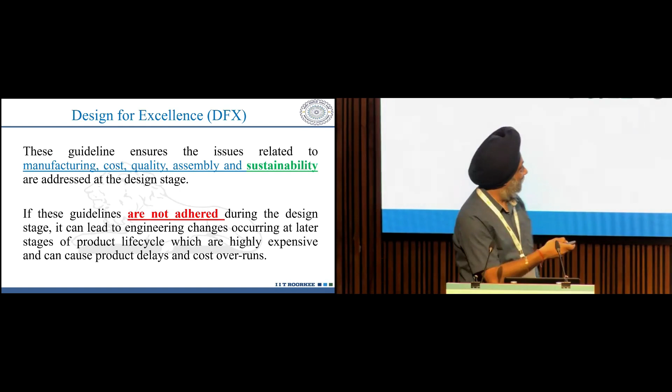Not changing. Now it is. It will take some time.

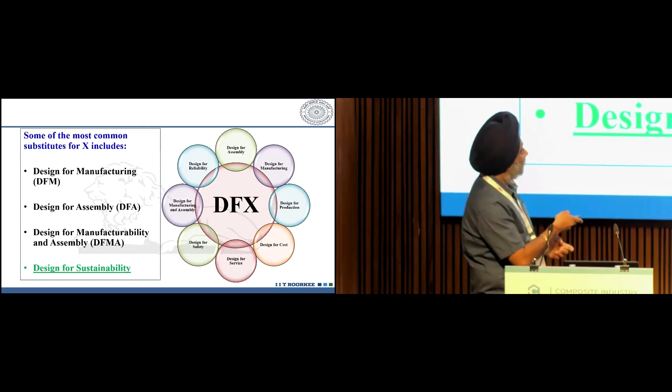Pointer, I think, is not working. Okay, now it is working. Okay, so I was here, so I think I had to point it this way. So this is the context in which I am going to speak.

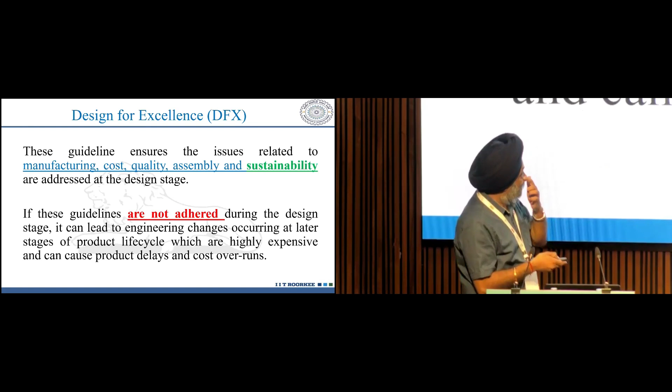Now we have a concept of design for excellence, because when we talk of a product, we talk about manufacturing, design of the product, then manufacturing, and then using the product. So the first thing in a product development cycle is design. This design for excellence is a well-known concept. What excellence means, X can be a variable. X can have different aspects as mentioned there.

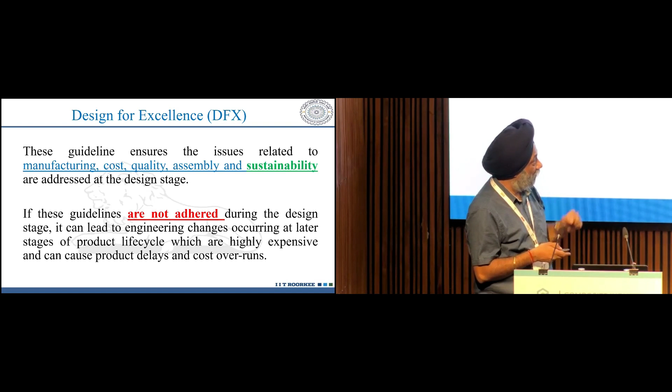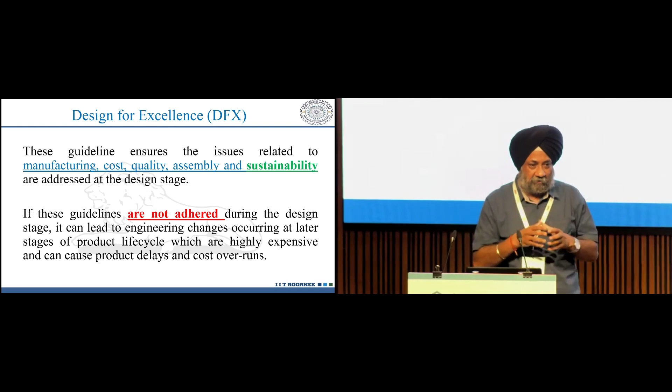It can be manufacturing, cost, quality, assembly, sustainability. Sustainability I have definitely put in green because that is the title of the talk today. And if these guidelines we are not focusing - now in design for excellence, the basic concept is that when we are selecting or making a product, we have to focus on all these aspects: cost, quality, manufacturing, assembly, sustainability, and come up with a solution that makes a trade-off among all these different aspects.

For example, for the aerospace industry, one of the important aspects can be weight. Since morning all speakers have focused on weight, so weight can be one of the parameters for a product used in the aircraft industry. In one of the books it is written that if you are able to save 1 kg weight of an aircraft, you can save 6 gallons of fuel. That is the kind of indirect advantage you gain by reducing the weight of an aircraft. So what I am trying to emphasize is focusing on what the product is going to do.

For example, if you want to make a toothbrush handle, weight may not be a very important criteria there, because already it is lightweight plastic. Then you are making a composite - target can be sustainability. There is even a design in which a toothbrush handle can be used multiple times, only the part with the bristles will change. It can be screwed or joined using any type of arrangement with the handle. So you can reuse the handle multiple times, only changing the bristles part as per the doctor's advice, maybe after every 3 months.

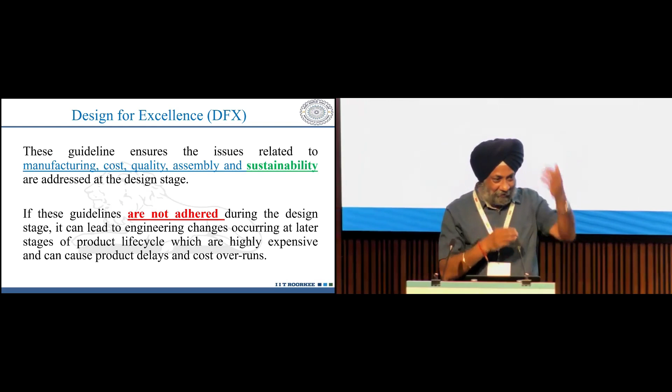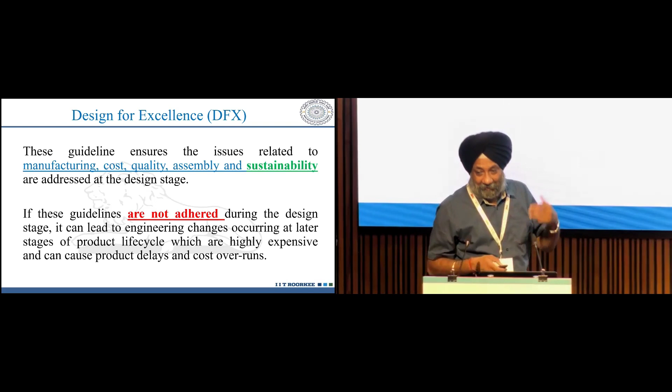So when you are designing a product, you have to see what the focus areas are for that product - it can be cost, reliability, quality, assembly, manufacturing, sustainability, environment. We have to keep that in mind. And if we don't follow these guidelines, what can happen? Many products - if you Google or go to YouTube and search for failed products, you will get a long list of videos highlighting failed products and why they failed. So if the guidelines are not followed at the design stage, the product can fail.

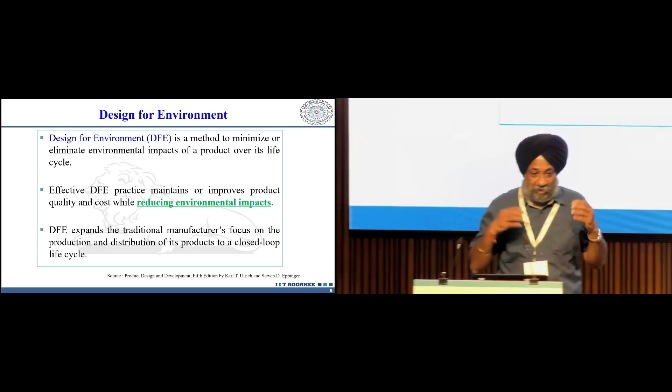Now DFX has got different dimensions, as I have already highlighted: assembly, manufacturing, cost, service, safety, reliability. Now our focus today is design for environment. So sustainable composite materials means materials which are good for the environment. How can we follow these guidelines? What is our model today? I think those from industry will definitely echo the same sentiments that I have.

What is our model? Our model is take, make and waste. So we take some material - first we identify who the raw material suppliers are going to be. In the morning, I think everyone has said there is a challenge to get raw materials. So we take the raw materials, we make a product, we sell it in the market, and then our job is over. Normally we don't think about what will happen to the product at the end of its life. But that is not going to be the case in the next 10 to 15 years. We will have to take responsibility for our product right from the launch in the market to what happens to it at the end of life.

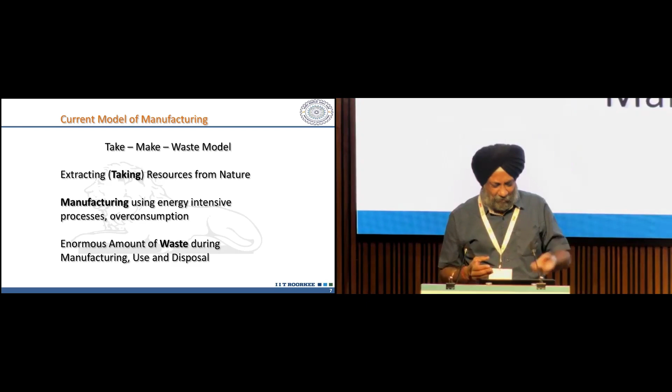I have just two sentences to say. One of our professors went to Japan and bought a second-hand car. When he was coming back, he was not able to sell it again. He had to pay more money for disposing it off than the money he spent buying the car. So what I am trying to emphasize is, you as a user have to take the onus of the product, or as a manufacturer first you have to take responsibility, then as a user, for what happens to my product at the end of life.

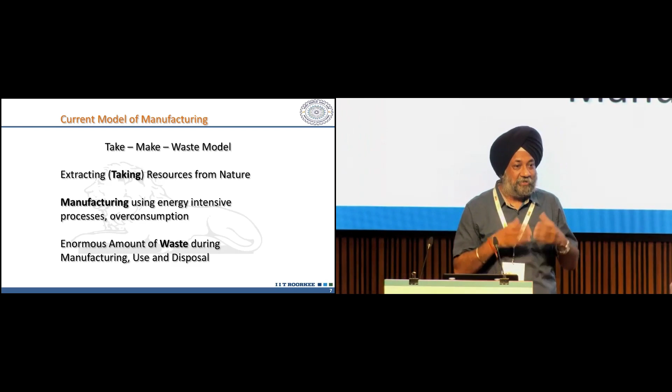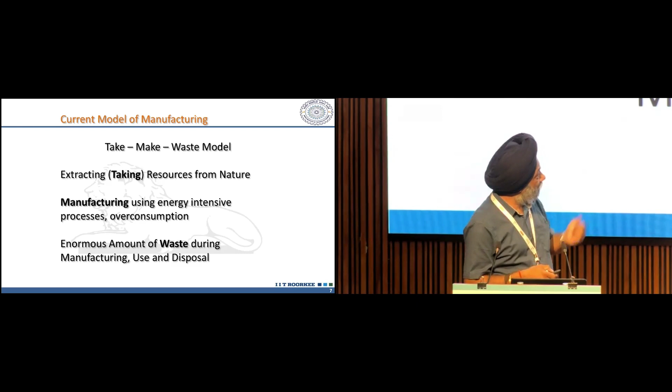So therefore these concepts become much more relevant, that we design a product in a way that it is reusable, it is recyclable, or you can remanufacture it. So therefore this concept of design for environment has come into being. Enormous amounts of waste are created, and we have to see how we can eliminate this waste. This is the overall product life cycle.

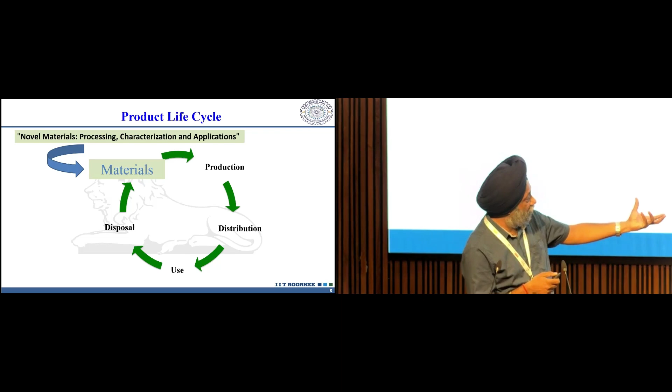And finally, at the end of life, what can be done? We can try to decompose them, and they get converted again into the natural ingredients. So this is a cycle which we try to analyze in our studies.

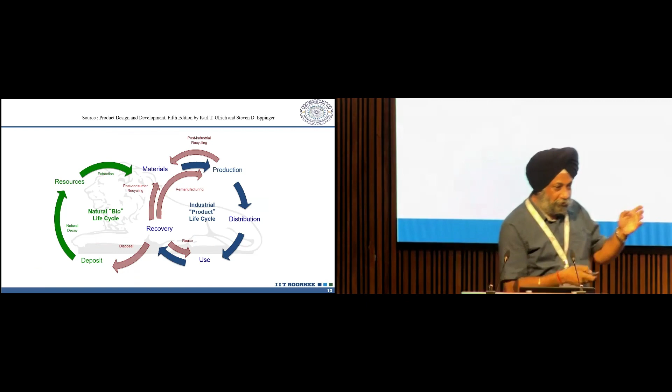So this is a very, very important diagram, and this chapter has been introduced in this book by Steven Eppinger just maybe 10 years back. Earlier, this was a book, a very famous book, Product Design and Development, but now this chapter on design for environment has been added.

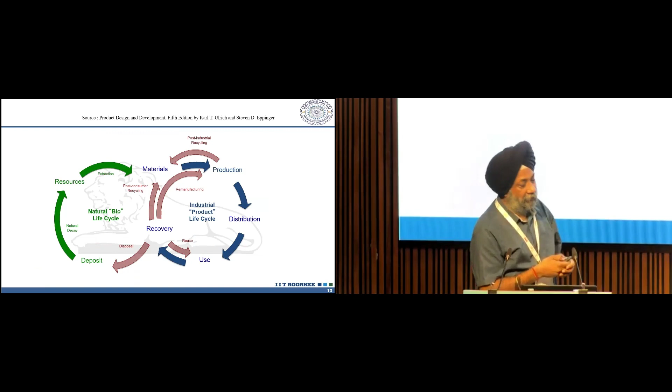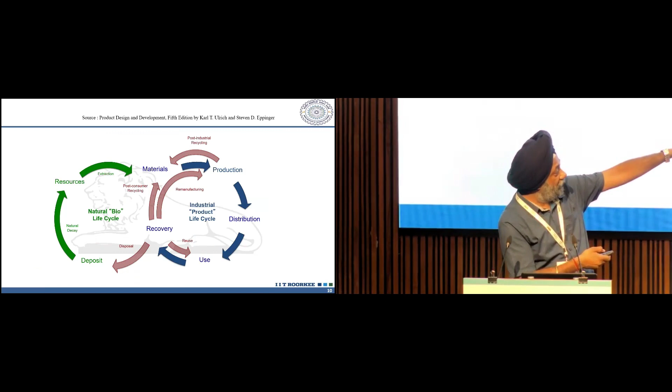And if you see, this is a natural cycle on the left-hand side. From nature, we are taking the materials, we produce a product, distribute it, use it, and then at recovery we have to see what can be done with these materials. So this is, I think, a challenge.

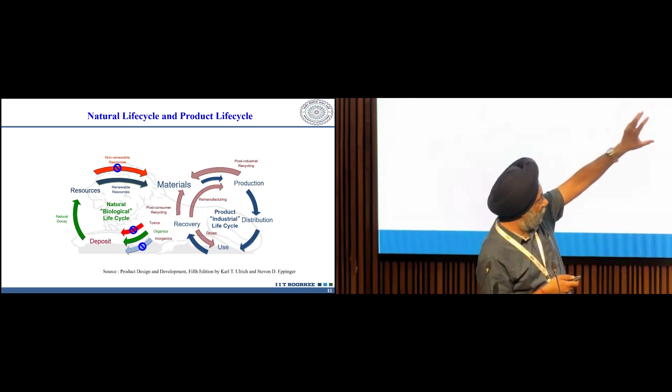So our first decision to choose a material for our product is very, very important, because if we choose a very environment-friendly material for our product, then automatically at the end of life we will have less challenge to dispose it off into the environment. So the first decision regarding the materials, if we can get that right, it will make our life easy. This is a summary of this.

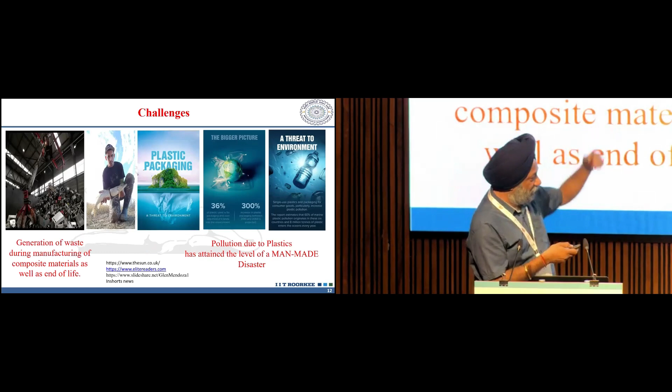These are the challenges for plastics all over the world. Every year we celebrate... these are some of the case studies about plastics. These are the single-use plastics. I will skip this, I think everyone is aware. So on World Environment Day, every year we try to focus on the environment.

So what the composite industries can take from that is, we have to reduce the use of polymers and try to emphasize reuse. Now reuse is only possible if your raw material is recyclable. If you talk about thermosets, they are difficult to recycle, but for thermosets also now there are a lot of strategies - you can pulverize it, grind it, and then mix it with some other form of material, use it as a filler. So you can have different strategies for recycling thermosets also, but thermoplastics are easily recyclable. We have done a lot of work in recycling of thermoplastics also, and published it. So if someone is interested, you can write to me, we can discuss it further.

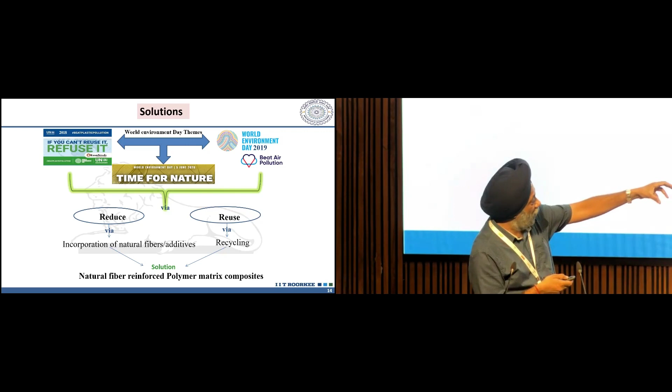So what we are trying to do now is, with this reduce, reuse approach, we are trying to integrate natural fibers with thermoplastic polymers and trying to make composite materials which are natural fiber - natural fiber reinforced polymer composites.

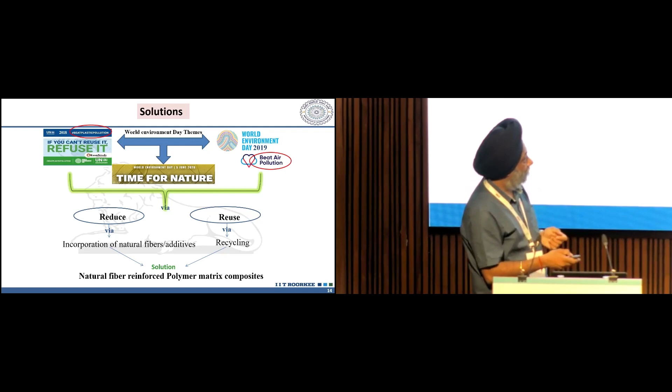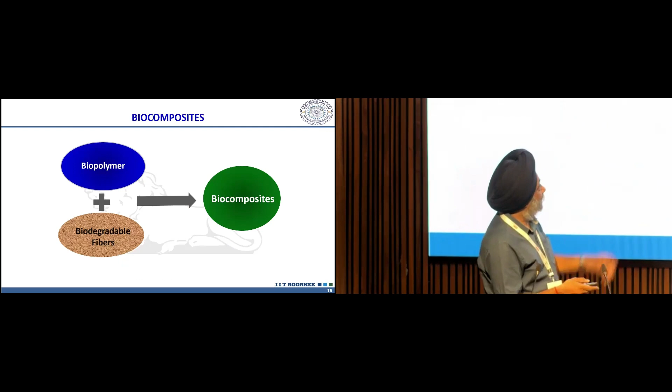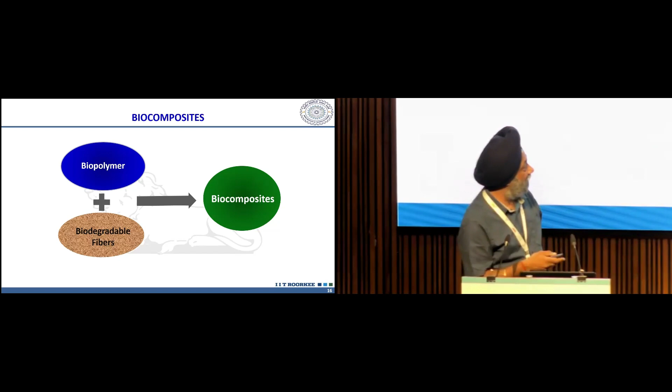So this is our concept now. We take a polymer, which is our matrix, which is biopolymer, and biodegradable fibers, and combine them together. How we combine them, I will show in the next slide, and then we try to make biocomposites which are green in nature. So sustainable composite materials we are trying to emphasize, which are renewable, recyclable and biodegradable.

Now many times these materials are difficult to degrade, and biodegradable means you degrade them under a specific environment, maybe a composting environment. You have to create a pit, put the samples there, and then investigate how this material will degrade. So all those aspects we are trying to analyze.

One of the students has already completed a PhD on understanding how these composite materials degrade over a period of time - maybe 6 months, 1 year, 1.5 years, 2 years - what happens to the materials. So that kind of studies we have already done.

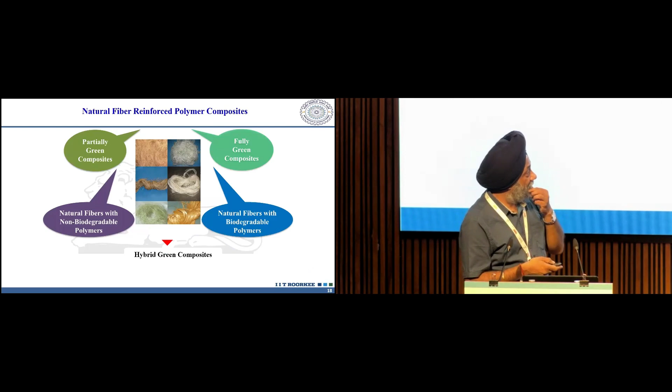This is a concept of natural fiber based composites. You can make partially green composites or fully green composites. Fibers are derived from nature - they are natural fibers. And we can even have hybrid, where many times we talk about the strength.

I know this question will come to many delegates' minds: the strength of carbon fiber is very high, glass fiber is very high. How will these natural fibers attain that kind of strength? So therefore, I told initially that these materials right now are being proposed for non-structural applications, high volume.

On a table you have a stand which is made up of plastic. Now you can replace that using a thermoplastic with 30-40% of fibers. The fibers are also coming from maybe sugarcane waste fiber, or rice husk, wheat husk, or even in Uttarakhand and Himachal these days.

Maybe in the month of April, May and June, there are a lot of forest fires - all of you may have read in the news or seen on television. Now these fires are caused because of the pine needles of the pine trees. The government is saying they are ready to give them free of cost, even ready to collect and supply wherever you want, because this is a menace that leads to forest fires, with lots of our jungles subjected to fire.

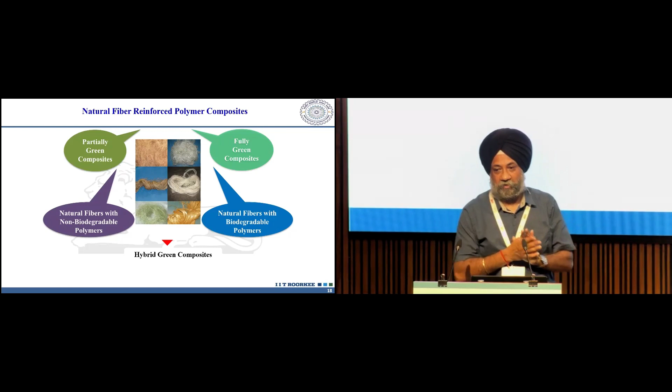Even the Forest Research Institute is doing a lot of research on how to avoid this problem. We are also collaborating with Forest Research Institute in Dehradun, trying to develop fire dousing tools. This year only, 5 people lost their lives during jungle fires in the state of Uttarakhand. So this is a natural resource which is freely available.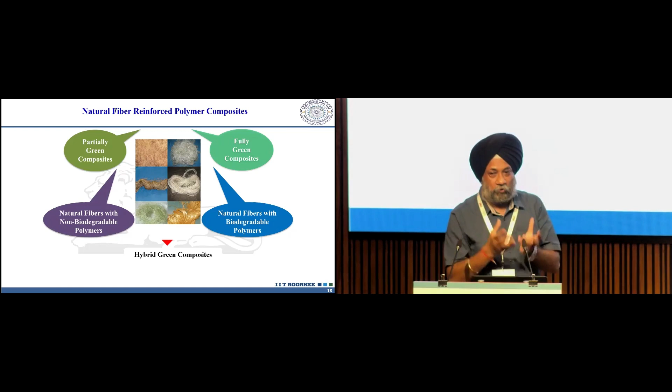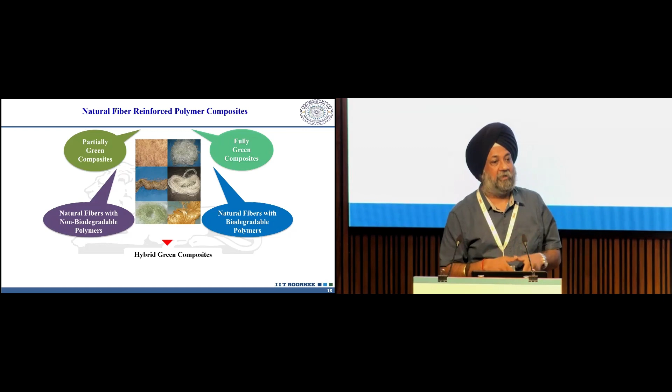Now if we can put 30% of this into making tables with biopolymer, this can be a good product that can be used by all of us, which will be environment friendly, or we can say a biodegradable product. So this is the concept through which we can achieve this. The next slide will make it more clear.

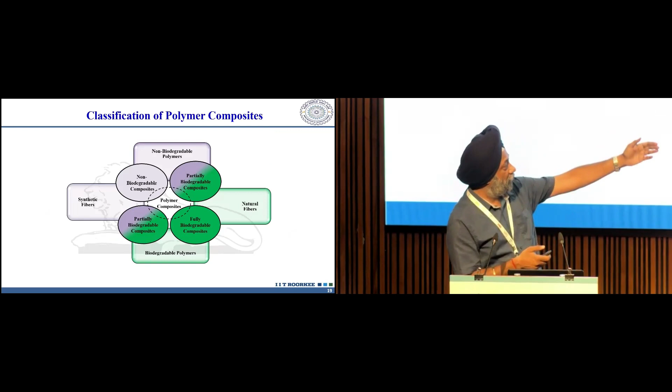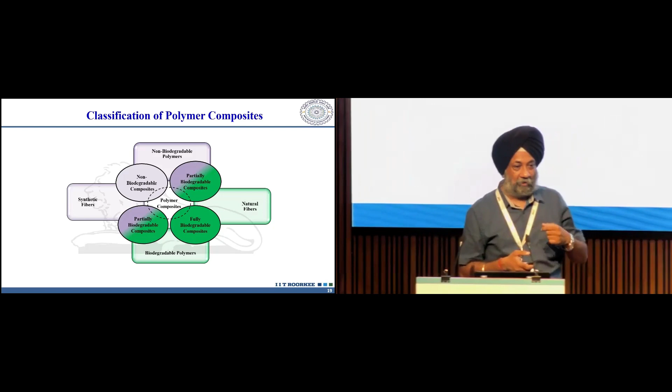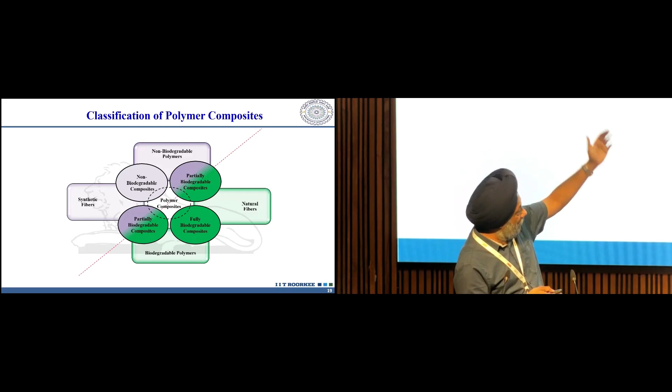So if we have natural fibers and biopolymers, we can make fully biodegradable composite materials. But at the same time, there are non-biodegradable polymers like the ones we use today - epoxy, polyester. So if we have different types of non-biodegradable polymer, combined with glass fiber or carbon fiber, we make non-biodegradable composite. In future, maybe we will see a transition from non-biodegradable to fully biodegradable composites without compromising strength and other requirements.

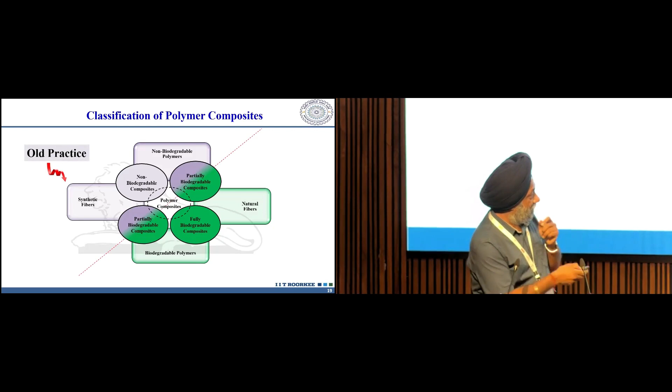And this was the old practice, and this is the research trend now.

Today also, this morning I was checking my email, 2-3 research articles have come, not only from India but from the globe, where people are focusing now on natural fibers all over the world. It's not only that, but India has very large flora and fauna, the kind of fibers - we are the biggest producer of many natural fibers as a country. So we can always leverage the potential that nature has already given us.

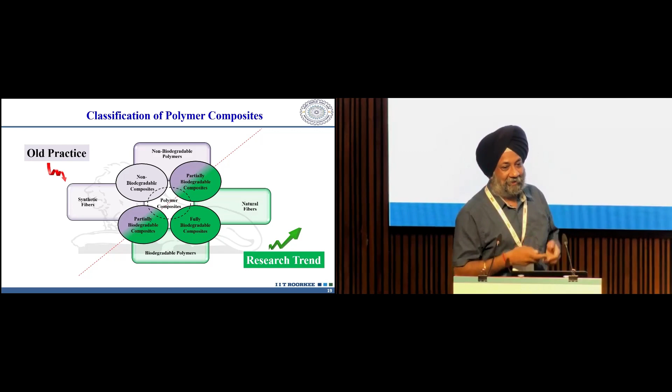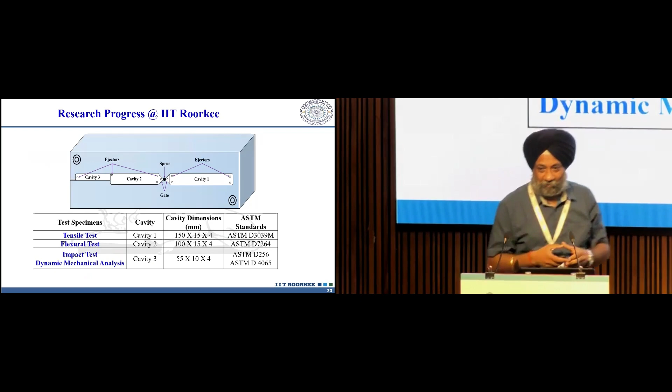Now we only have to think how we can make entrepreneurs out of it and how we can make products out of it. So what we have done now - maybe another 10 minutes - because we are an academic institute, our outcome is measured in terms of publication and technology transfer. So we do research in this area.

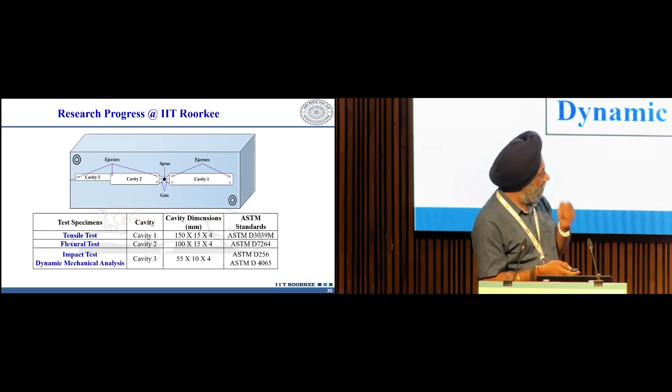These are the samples that we make, which are as per the ASTM standards. Different tensile, flexural, impact testing samples we make.

This is the setup that we use. This is a direct injection molding setup, where you have a fiber and a polymer. Fiber is in short form, so these cannot be used for very high strength applications. Where you need very high strength, you have to go for woven fiber as a reinforcement.

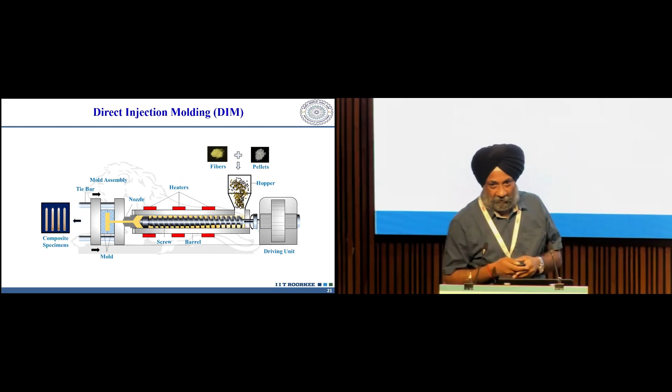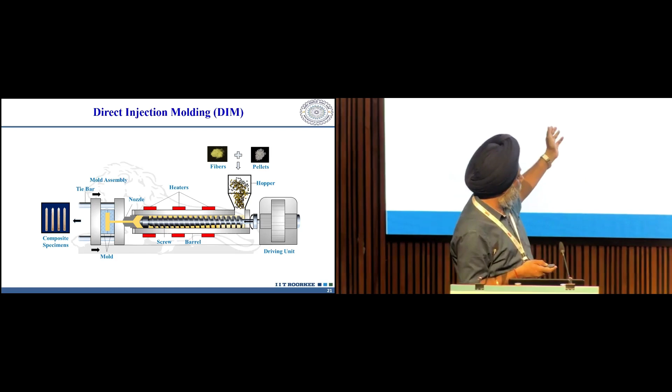But here we use short fibers. Natural fibers are available easily in this form. We mix the polymer pellets and the fibers, and then mold them into the samples.

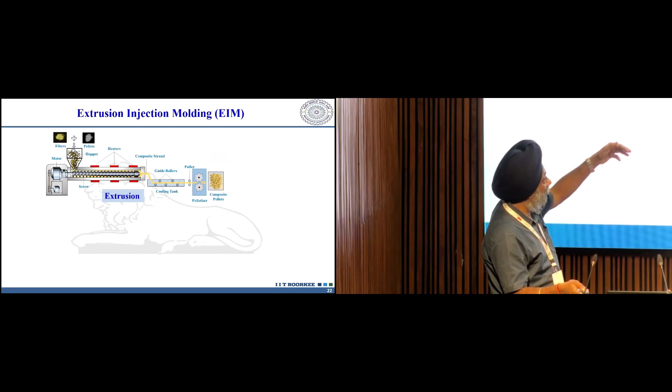These are the samples. Then we use the extrusion injection molding process also, where we extrude initially the fibers and polymer pellets into composite pellets, and then these composite pellets we use as raw material for injection molding and make the samples.

This is an extrusion cum injection molding process. Same samples we have made here also.

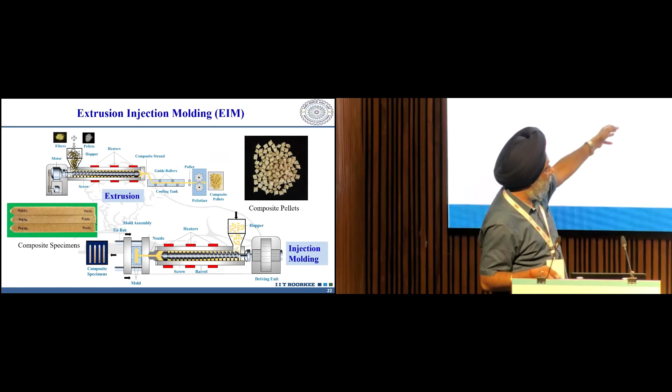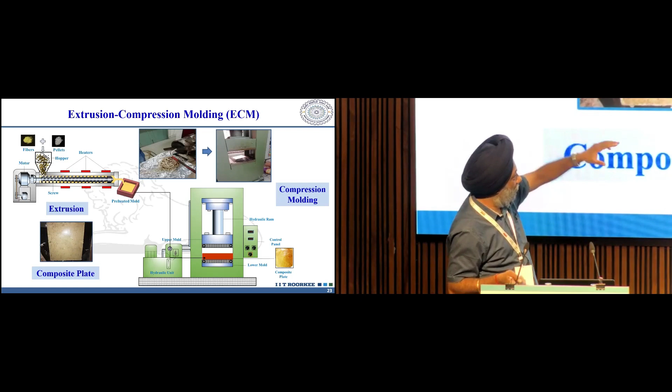Then we can even use extrusion compression molding, where we extrude first a wire, then take it to compression molding and compress it into the form of a plate, where we get composites in the form of tiles. I'm not showing the mechanical characterization, but these are all samples made by different processes: direct injection molding, extrusion injection molding, and extrusion compression molding.

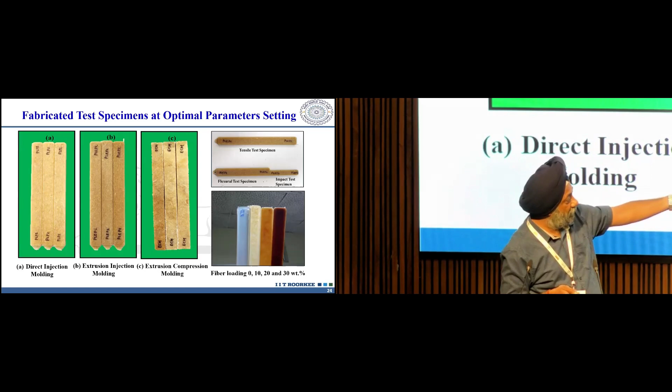If you see the effect of fiber loading on the right hand side, we can see a pure thermoplastic sample versus composite thermoplastic samples with 0 percent fiber, then 10 percent, 20 percent, 30 percent. So the color is also changing by addition of the natural fibers.

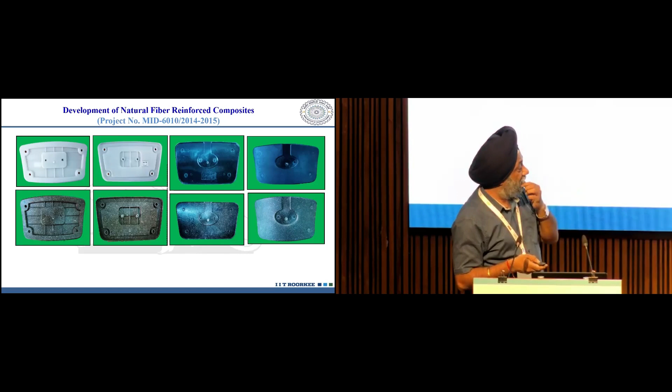These are some of the samples. We got a project from the top furniture manufacturing company in the country, and these were the products we changed for them. The top one is the first product that they were making, a pure polymer product. Then we put 30% sugarcane fiber into it, and this is the product that came out.

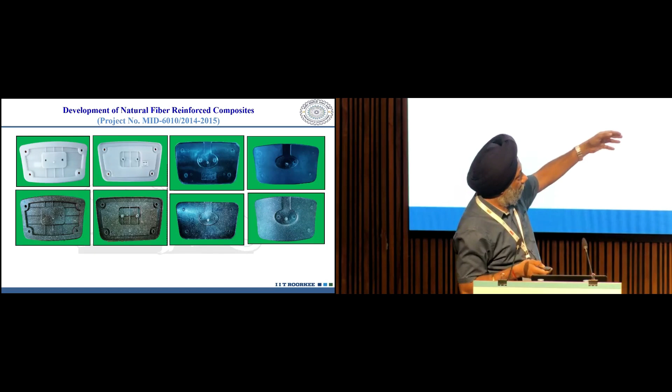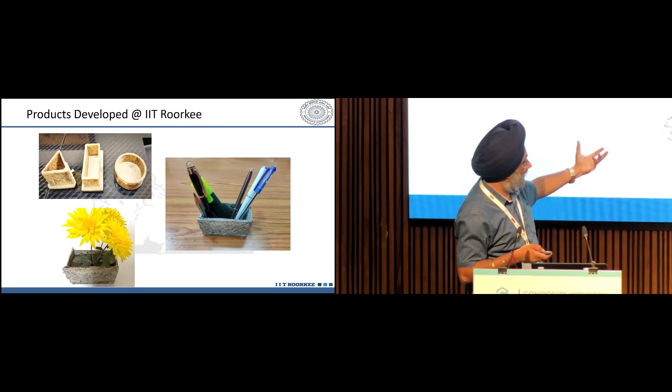These are some of the products we have developed. These are all child parts in a chair, different types of child parts that are used there. Then this is a flower pot which can be made, and this is a pen stand which can be made with a natural fiber based compound. You can even give different shapes depending upon the mold that you use.

Then this ward separator, during COVID we have developed this. This is not our image, but we have also developed a similar ward separator in which we recycled the coats that were used for the patients. Those were recycled and then used with jute fiber to make the composite.

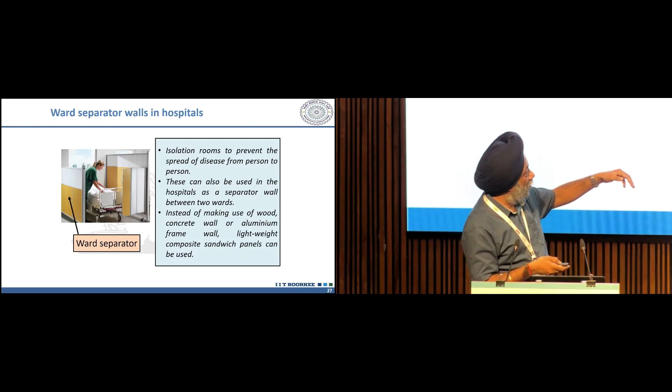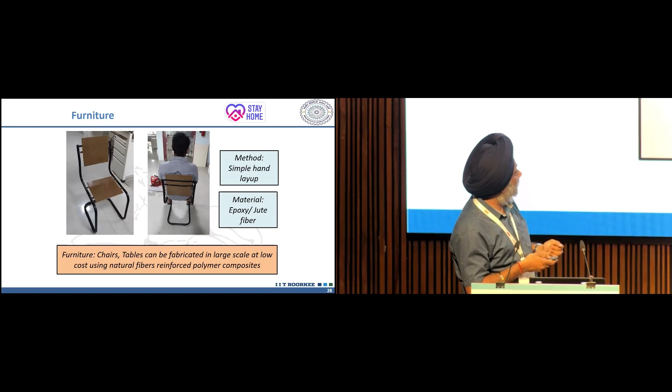This is one chair with jute fiber and epoxy, made just as a demonstration of application of composite. This can undergo a lot of iterations; it can be further improved.

I have already got a message about the time, so I'm just skipping some of this.

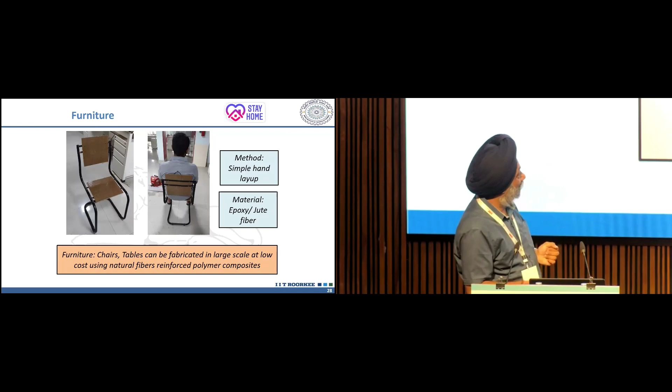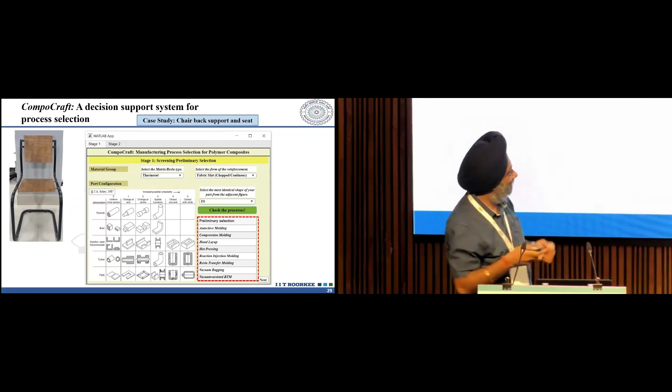So now, since many of you are from industry, sometimes we feel that X is an expert or Y is an expert in this field. Now, how to get in touch with that? And many times for academia, you feel that IIT or other institutes charge a lot of money to provide the expertise.

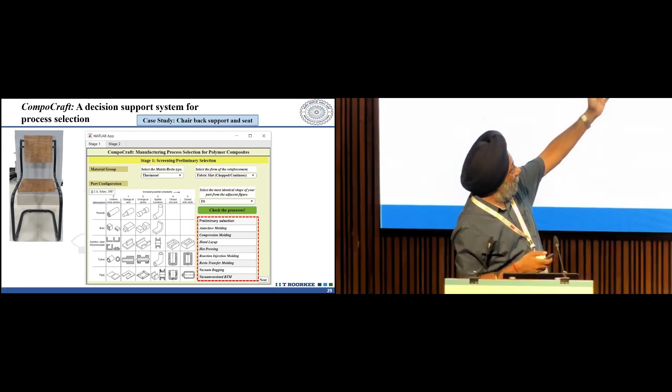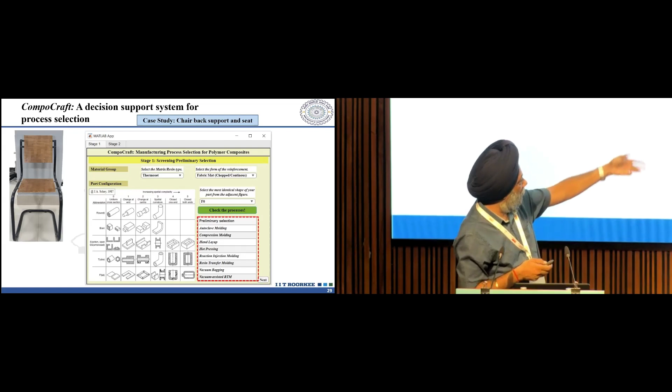So one of my students has developed this software, which is a process selection software where a user can give input. As you see at the top, thermoset or thermoplastic, which material you want to choose, there is a drop down menu. Then the shape complexity or the process also, check the processes available from this table. You can see which shape closely relates to the product you want to make.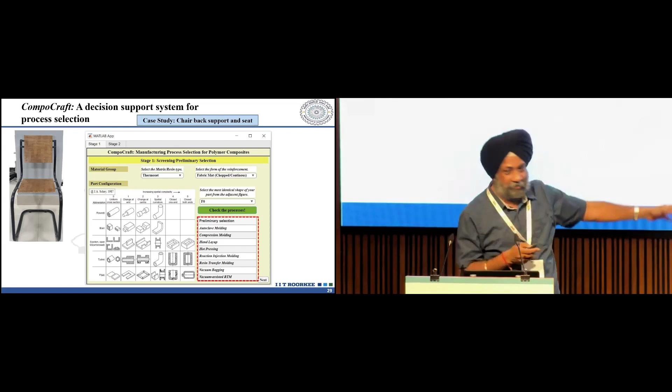So based on all this information the user provides, he may not be having any technical knowledge. He may not even have heard of all these processes listed there. He may just be an entrepreneur who wants to start a business in the field of composite materials. So they can use this platform for selecting the right process for the composite material.

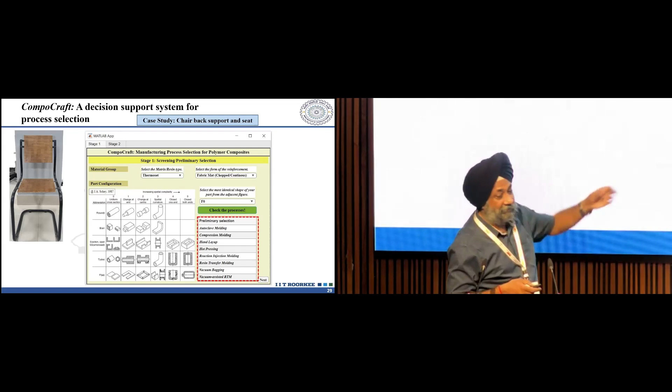So we have done a case study on this chair only. Now this calculates based on the input. It calculates PCS, which is a process compatibility score for all the processes.

All these processes that you see there - compression molding, hot pressing, reaction injection molding - there is a long list of processes. It calculates a PCS score and a cost rating.

Now many of you may be wondering how this software will work. This PhD student, a girl, has already completed it. In composites there is a lot of experimental work - you have to go to the lab every day, spoil your hands working with machines. Being a girl, although girls do better job than many of us when sincerity is concerned, she said, sir, I am from industrial engineering, I want to do something related to software. So I said, okay, you do this job.

And she has done a wonderful work in this. 2.5 to 3 years was spent only on collecting all the data available in the world in the field of composite materials, manufacturing of composite materials, and processes related to composites. A huge database was created, and based on that, she used artificial intelligence and machine learning algorithms to code this whole program.

This is a graphic user interface created for the composite industry, where the user may not be an expert. He would not like to spend 3 years to collect this data. He or she can just put the input that I want to make this product.

It resembles closely to this product, because if it is directly the same product, it will even give a better result. So you choose the shape, you choose the volume, how many you want to make, you choose the material - thermoplastic or thermoset. The software will calculate these two scores, the cost ranking and the process compatibility score.

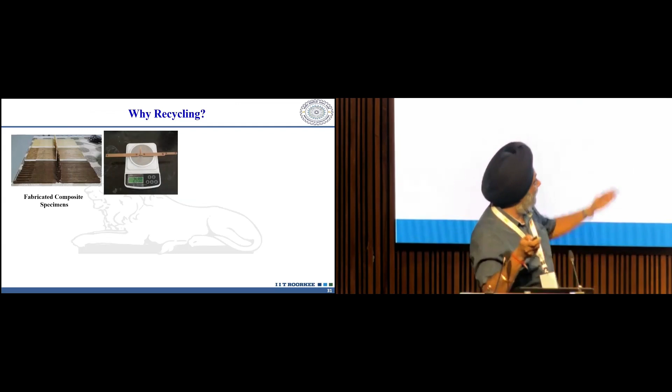Now the last part, the future, where it can lead us. These are all the samples that have been made, and you can see it showing as 25.98 grams, and if you cut that sprue part, it is 2.46.

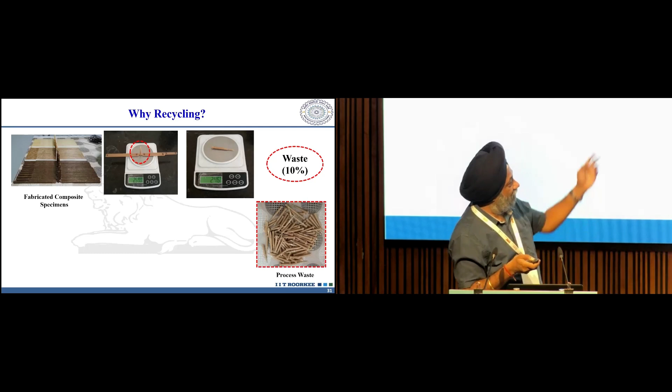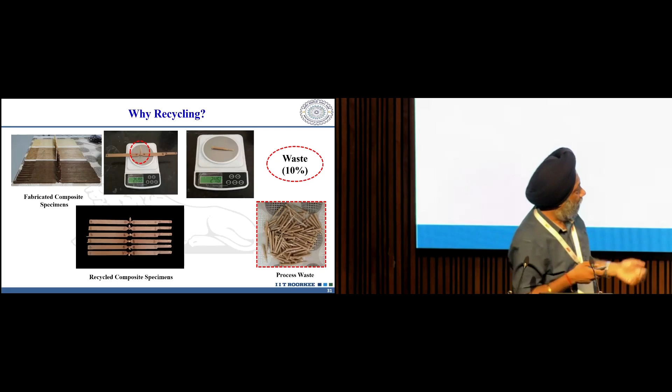So almost 10% of the material is going as waste. This 10% we have collected, we have not disposed it off. For different samples that were fabricated, with this process waste only, we have recycled them into samples and tested again. Multiple time recycling was done. I am not showing the results here, but we have found that 3 to 4 times, even 5 times, if you recycle, the properties of the resultant composite are better than the pure polymer.

This is a thermoplastic polymer. So if you use a polymer, you get property X. If you add fibers into it, X plus delta X. But when you recycle it multiple times, still the property that you get is more than X. So it means it is recyclable 3, 4, 5 times, and still you get properties better than the pure polymer product.

This has also been published in an article. If someone is interested, write an email to me, I will share it. Read the article to see how it was done and what results were achieved.

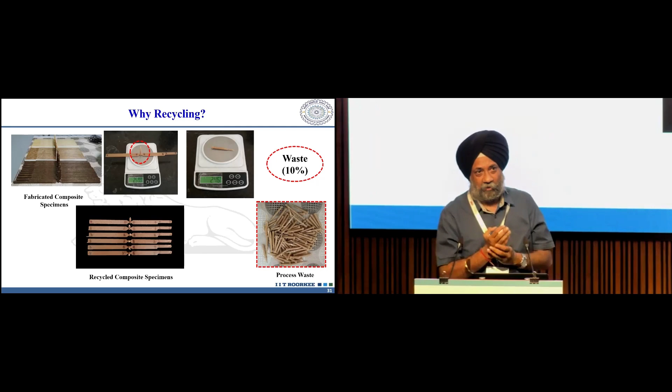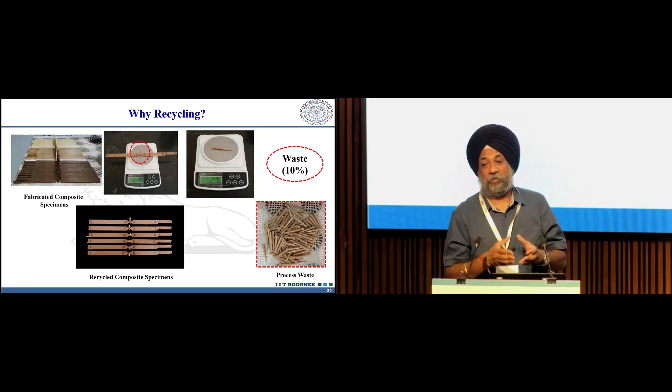But today I don't want to barrage you with lots of data on strength, stiffness and all these values. Just a concept - this may be in the composite industry in the next 10 to 15 years. Maybe it has already started. I visited a Plast Focus exhibition in Delhi about 3-4 months back, and there were already 2-3 companies making products using natural fibers and thermoplastics for mugs or tabletop products. Entrepreneurs have already started exploring these ideas of sustainable products to make money out of this concept.